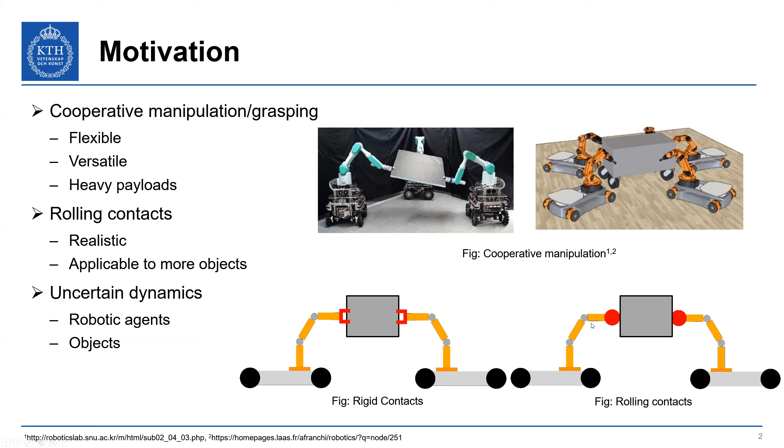And so you have the cooperative manipulation entailing multiple manipulators working together to grasp the object instead of having each rigid attachment to an object. So this applies to more general objects because you just need to have contact with the object. And what we want to do is we want to look at uncertain dynamics because we don't know a lot of the dynamic parameters of the robotic agents or of the object that might be needed to be transported.

So previous work, as I mentioned, a lot of it has focused on rigid contacts, but also some focus on having some knowledge of the dynamics or require some force or torque sensing at the contact point, or similarly knowledge of the object's center of mass.

Whereas in this work, we want to look at cooperative manipulation with rolling contacts, so a less restrictive form without requiring force sensing. We want to look at how to use adaptive control to address the uncertain dynamics and object center of mass simultaneously. And as a result of looking at rolling contacts, we have another difficulty. We have to ensure that there's no slip so that we can actually hold the object throughout the entire trajectory.

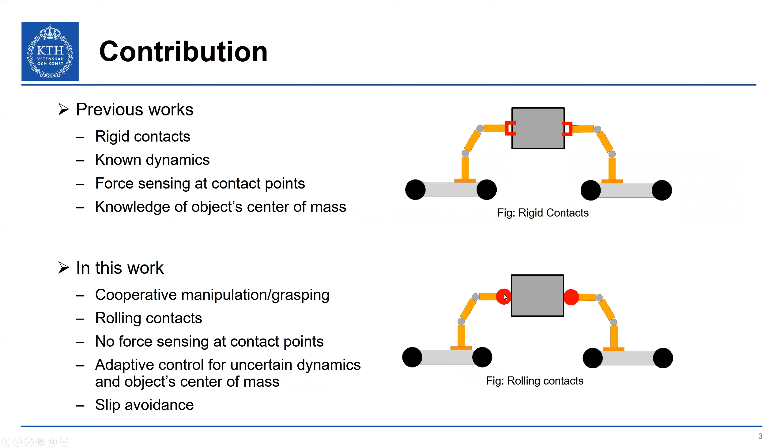So to get into the problem formulation, here we have n robotic agents depicted in this figure on the right. And each agent has its configuration defined by q_i. We have the conventional Lagrangian dynamics, inertia matrix, Coriolis matrix, gravity torque.

This term here is the torque applied on the joints of the robotic manipulator that is dependent on the contact force. So each agent will contact the object at some point, and there will be some force transmitted at this point, and that is what is mapped here by the agent Jacobian onto the torques of the manipulator. And finally, we have the control torques that we will implement, our control input to the system, u_i.

So just to take a little look at the agent Jacobian, it's dependent on the conventional Jacobian for a robotic manipulator, but multiplied by this matrix. Here we have the identity matrix, and what this term is, p_FCi, is the location of the contact point for each agent. So with this, we can concatenate all the dynamics together to get a vector form of the robotic agent dynamics.

We can do something similar with the object. We know that the center of mass is denoted by this bar. So x0 is the pose of the object, p0 bar is the position, eta is the orientation. And we can write the conventional Euler-Lagrange dynamics. We have, again, the inertia, Coriolis, and gravity terms. This term here represents the net force that's applied on the object about its center of mass. So again, we have the relation between the contact force and G bar, which maps that into the net force.

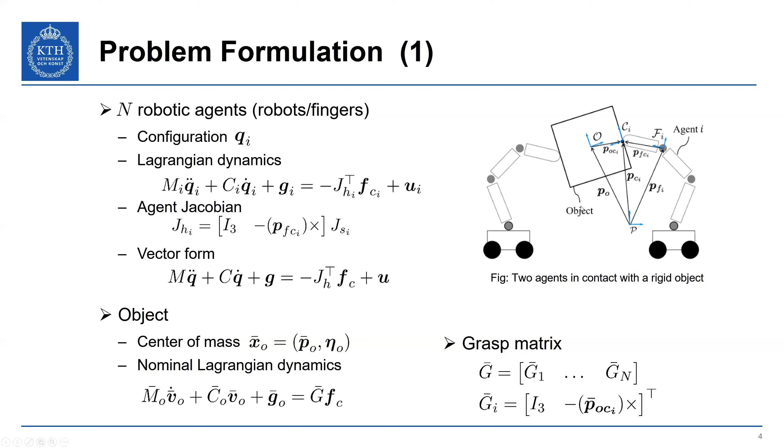Now we set up the dynamics, but we actually have the assumption that x0 bar is unknown. That is, the center of mass is unknown a priori to the system. Instead, what we want to do is replace this with some point that can be detected, say by markers on the object or cameras that can sufficiently track an object configuration. So this will be denoted by x0, and P naught is the position, eta naught is the orientation again.

So what can be done is we can perform a rigid body transformation. So here we're assuming that the center of mass is not moving, and we have the distance between the center of mass and this detectable point, P naught, written in the object frame. So when we do the rigid body transformation, we actually are including the center of mass terms into our new inertia, Coriolis, and gravity terms. But as a result, we actually eliminate it from the grasp map.

So now the grasp map, again, is a concatenation of the individual grasp matrices. And we have this term, which is no longer dependent on the center of mass, but only the distance from the detectable point, P naught, to the contact point.

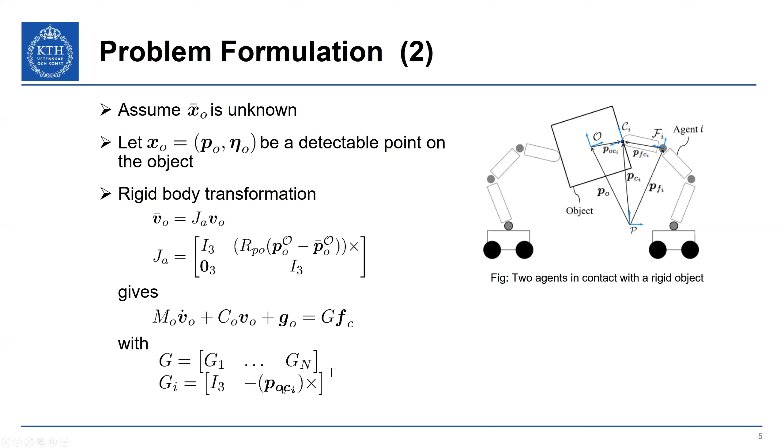Finally, because we have rolling contacts, we need to make sure that the contact points do not slip. This is eventually done by ensuring that the contact forces always remain inside a friction cone, which is depicted here on the right. The friction cone, for some fingertip touching object, is a set of all forces such that slip does not occur. And as is intuitive, the slope of this cone is dependent on the friction coefficient.

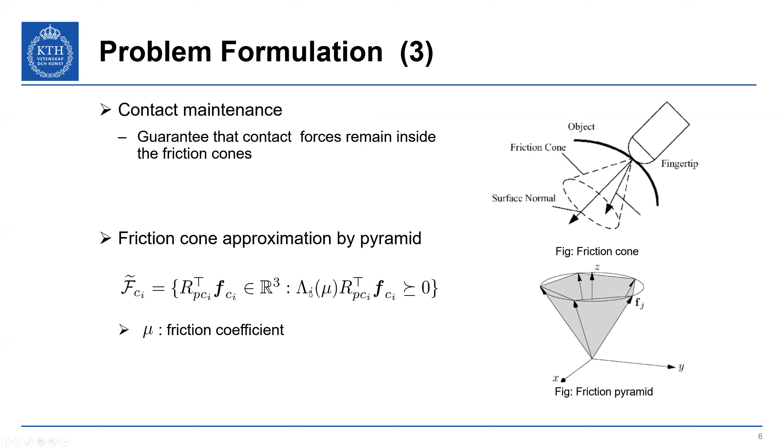However, this can be difficult to implement, and so what's typically done in practice is this cone is linearized. That is, there's an inscribed pyramid that's used to represent the friction cone. We denote this the friction pyramid, which is written here. The main thing to point out is that we can write the condition that our contact force is in this friction pyramid as a simple linear constraint as shown here. And this represents a vector-wise inequality. So basically map all the contact forces into the friction pyramid and check that it's non-negative.

Now we can get to the problem statement. We have some desired trajectory that we want the object to track. And we can define the error associated with the position and the error associated with the quaternions for the entire trajectory. So what we want is, under the condition that we don't know dynamic parameters of the agents and the object, we want to design a control law that asymptotically stabilizes the system about the origin, and also ensures that we don't slip throughout the entire trajectory so that the contact force remains inside the friction pyramid.

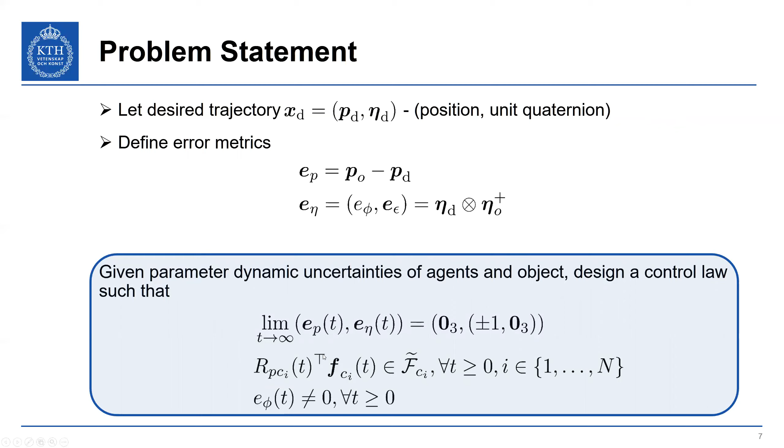The way to do this is we first couple the agent and object's dynamics together. So M tilde, C naught tilde, G naught tilde represents the coupled agent-object inertia, Coriolis, and gravity terms. And now we have the control input here that's mapped to the net force on the object by the grasp map times the inverse transpose of our agent Jacobian.

And what we've shown is that actually this system is still linearly parameterizable with respect to the dynamic parameter uncertainties. That is, we can rewrite the left-hand side of this dynamics as a function of the regressor matrix, which we know, Y naught and Y, times all the uncertain model parameters of the system. So nu naught are the unknown parameters of the object, nu the unknown parameters of each agent.

And so what we're going to do is try to estimate these parameters online. So we have these approximations, nu hat and nu hat naught, and we can find the errors between the approximations and the true values as these terms here.

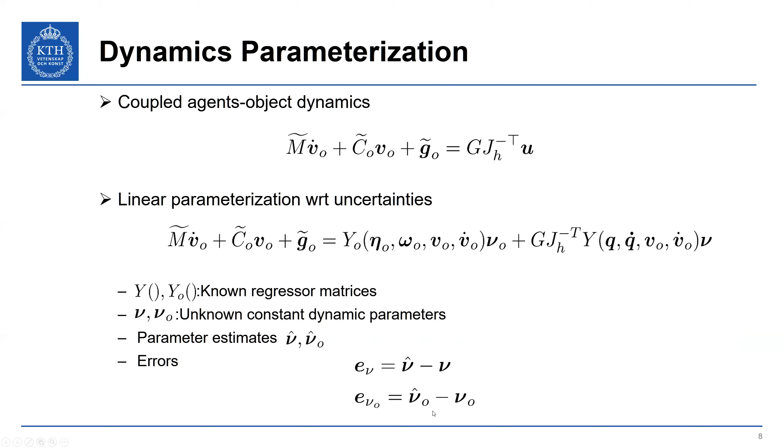So what we do is, again, in a similar adaptive control fashion, we try to feed forward the dynamics of the object, of course, with the estimated object parameters. And we have some feedback, PD type of feedback term on the error. So this is going to try to track the trajectory that we want. And FInt is used to make sure that we don't slip. This is telling each agent how to squeeze the object.

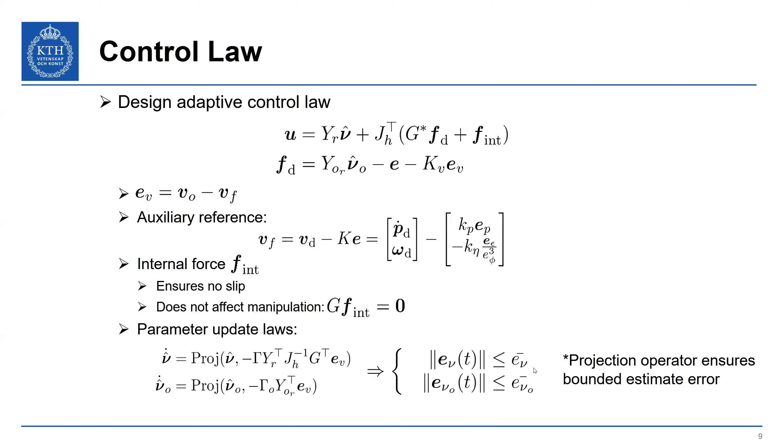So to the internal force design, this is a novel approach compared to many of the existing works used in the robotic grasping community. And what we do is we separate FInt into two main components, fint, which is the scalar term, and this L star. This RPC is simply a rotation matrix. So L star is associated with the direction of each internal force component. So we're just trying to minimize the overall squeezing term on the object, subject to these constraints.

So this constraint says that we're in the null space of the grasp map, which means that the internal force is not causing any motion on the object. We can only apply pushing forces on the object. And we always remain inside the friction pyramid. So once we have the direction of the internal forces, we then look at the magnitude. And this is where things become a bit different. We actually try to reduce how much energy is being used to hold the object by taking into consideration that we already have a force that's going to try to move the object.

So looking at this term, let's look first at this K. K here is the mapping of the manipulation term from our control law into the friction pyramid. And so what this kappa is saying is that if this mapping is positive, it means that the manipulation component of our controller is actually helping to apply enough normal force to resist slip.

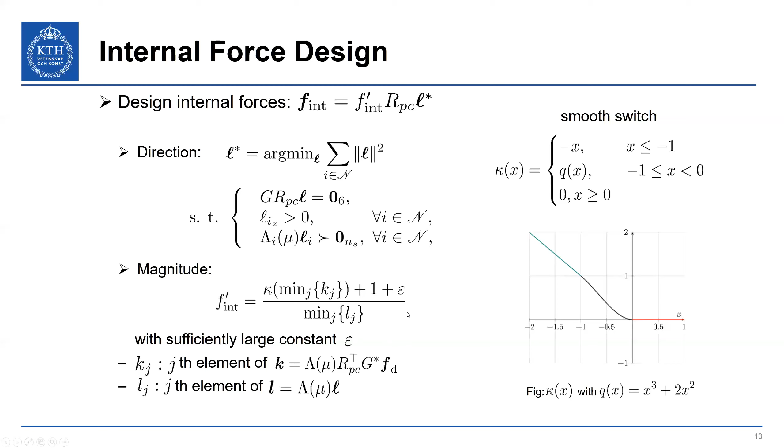So with that, we can get to the main theorem. We have a few assumptions to make. First, we have 3 or more agents which have non-collinear contact points. And basically there always exists a way to grasp the object. It's saying that the range of the grasp map intersected with the interior of the friction cone is not empty. This means that there exists a way to grasp the

object. We assume that our agent Jacobians are non-singular, so we have an appropriately defined reference, and the contact points do not exceed the fingertip surface. Finally, we assume we are not in a singular configuration with respect to the quaternions, and that the initial contact force is in the friction pyramid, so basically initially we're not slipping.

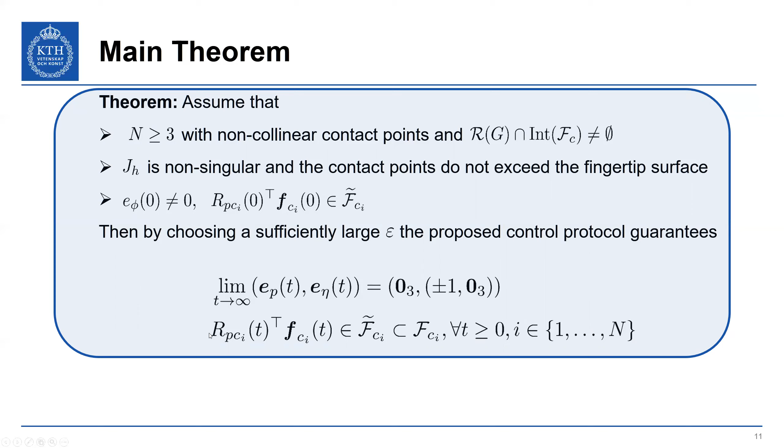So for some sufficiently large tuning parameter epsilon, which can be computed offline, the proposed control guarantees that we're asymptotically stable to the origin, and the contact forces remain inside the friction cone. So just a sketch proof of what's happening. Because the dynamics are continuous and the initial contact force is inside the friction pyramid, you know that for some instant in time, no slip will occur.

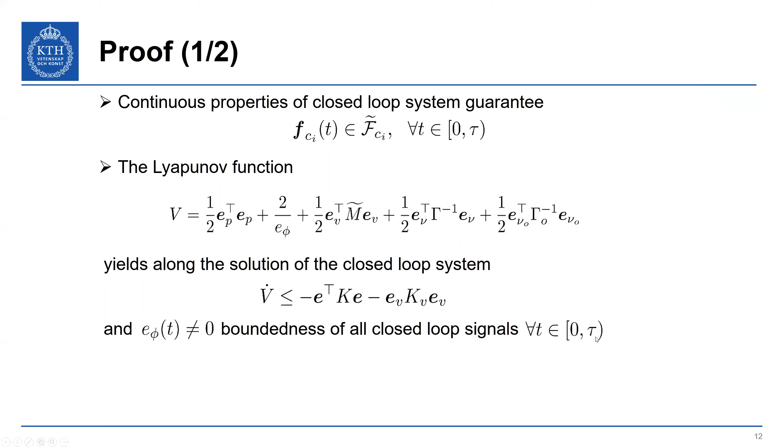And so what we can say is define this Lyapunov function, take its derivative. We see that in fact it's a negative semi-definite function, which is typical for adaptive control techniques of these types of systems, which means that all of the closed loop signals are bounded over this time interval. Now what we're going to see is what happens in the internal force. So we want to check that no slip occurs. So we look at the friction pyramid.

We define our contact force here that's dependent on the components of our controller, and we move all the uncertain terms to H, which is in fact a bounded disturbance on the system, and we can upper bound it by this epsilon of H. So when we substitute this into this condition to check if the contact forces are in the friction pyramid, we yield this equation which needs to be satisfied, and via the internal force design, we can show that with an epsilon term that upper bounds this epsilon of H, again this epsilon can be computed offline, then we will actually ensure that our contact forces remain inside the friction pyramid.

Now, because we've shown that the no slip is actively prevented, that means that we can repeat this analysis and basically extend tau to infinity, at which point we can apply Barbalat's lemma for stability. It shows that, in fact, asymptotic stability is ensured. And of course, as a result, we have no slip of the overall trajectory.

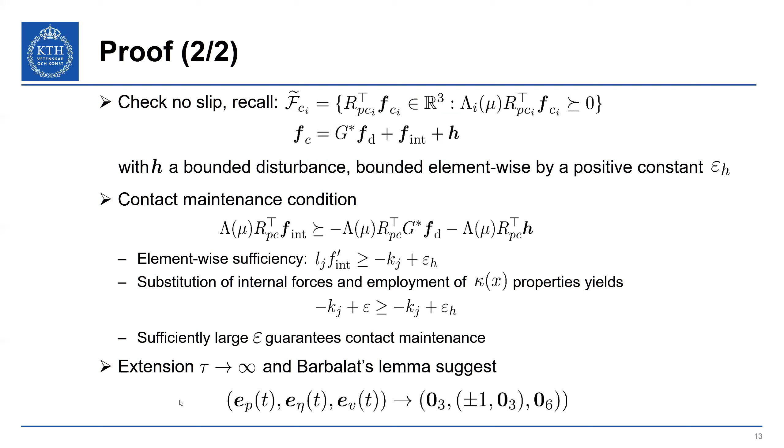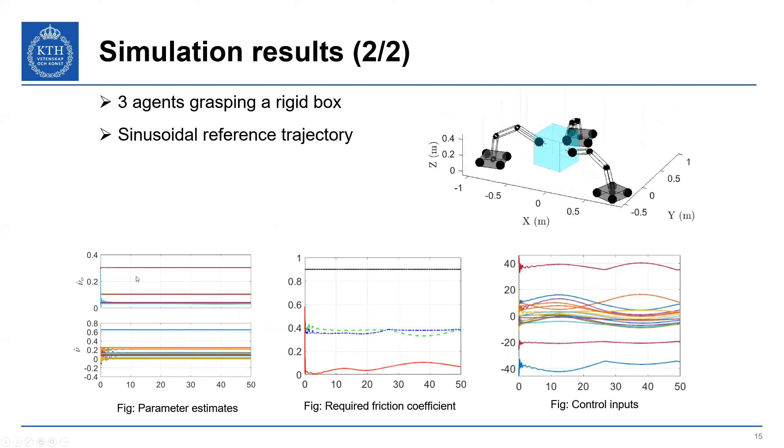So finally, we get to some simulation results. Here we have three agents grasping a rigid box. So this is a cube box, again with rolling contacts. We give them a sinusoid trajectory in position and orientation. And as shown, we see asymptotic convergence to the origin. But let's see now what happens with the parameter estimates. As desired, we see boundedness in both these estimates with an a priori bound defined.

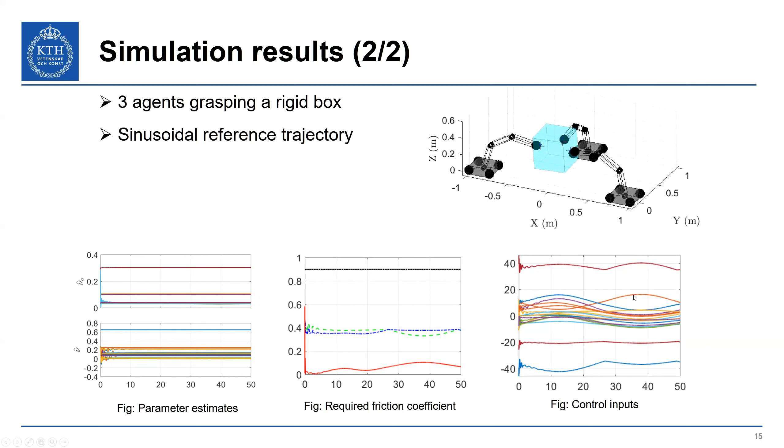In this plot, we're looking at slip. So the black dashed line is the actual friction coefficient in the system. And each of these three trajectories show the required friction for each agent to apply its contact force. And so since each required friction coefficient is less than the actual friction coefficient, it means there's enough friction to implement the proposed control strategy. And finally, we have the bounded control inputs that give us the asymptotically stable system.

So to conclude, we've presented a method of cooperative manipulation with rolling contacts. We've used adaptive techniques to address the dynamic uncertainties in the object and the agents. We ensured that there's no slip as a result of our controller without requiring force sensing or knowledge of the center of mass. So current work, which we plan to submit soon, is the decentralization of this proposed scheme, relaxation of the singularity assumption, and addressing grasp reconfiguration, highlighting one of the advantages of having rolling contacts, which is that we can adjust the grasp online.